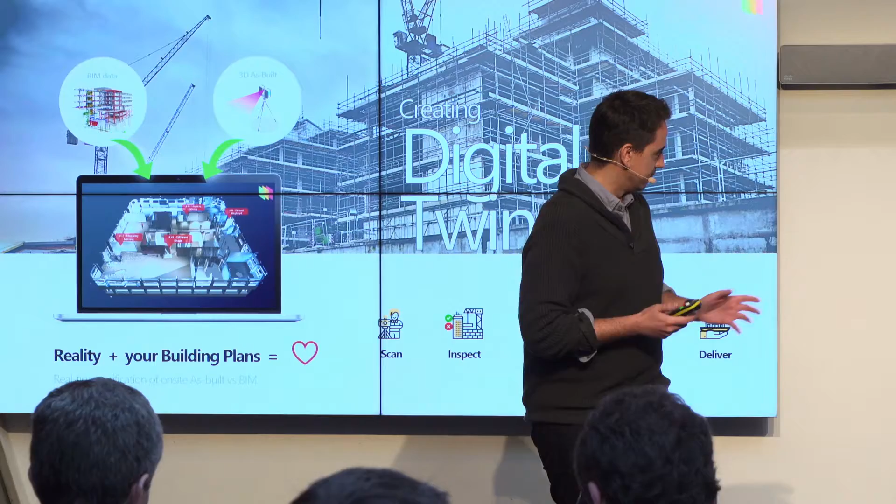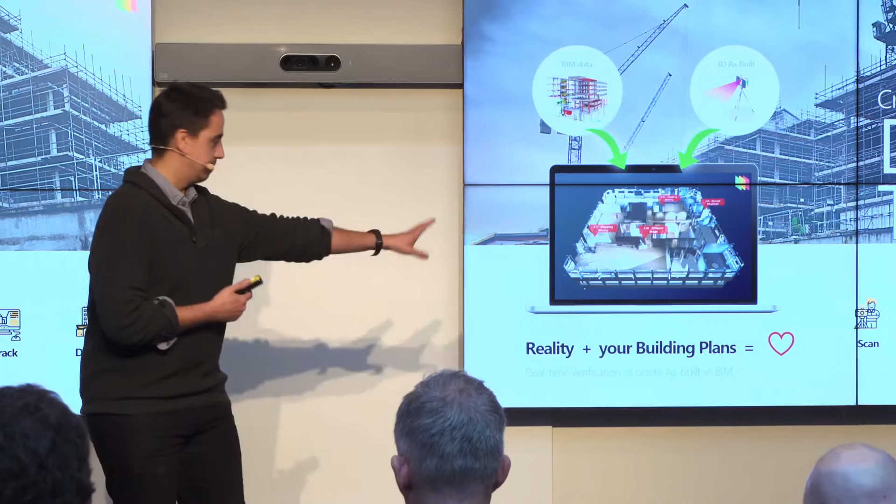The concept is very, very simple. If the on-site reality and the documentation in the building plans match each other at all times, there's love for everybody. For the owner, for the contractor, for the suppliers, the consultants, everybody collaborates better. Everyone's on the same page.

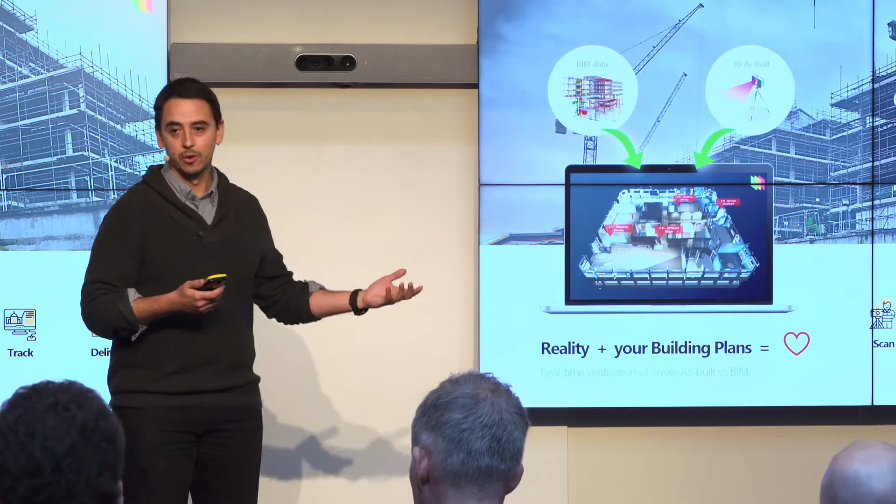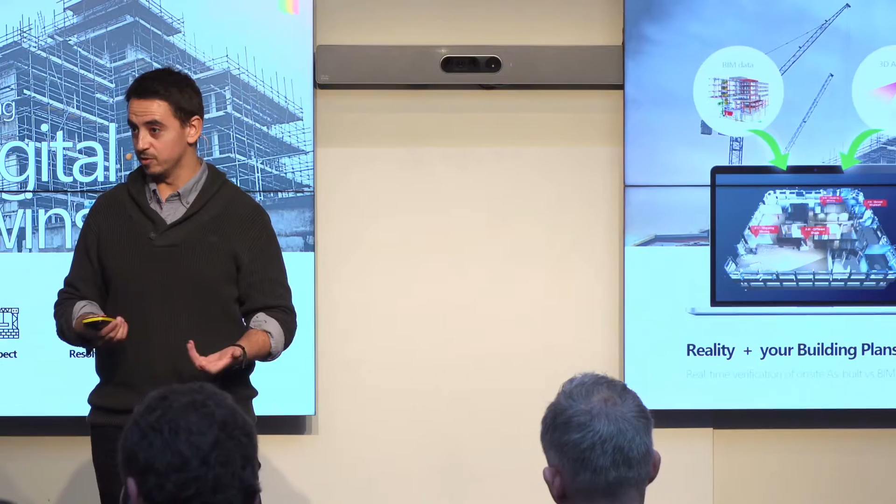So how do we go about making this happen? We've created an online platform that first plugs into your building plans, represented there as your BIM models for your project, and sets those up as the performance targets, because by definition, that's what your plans are.

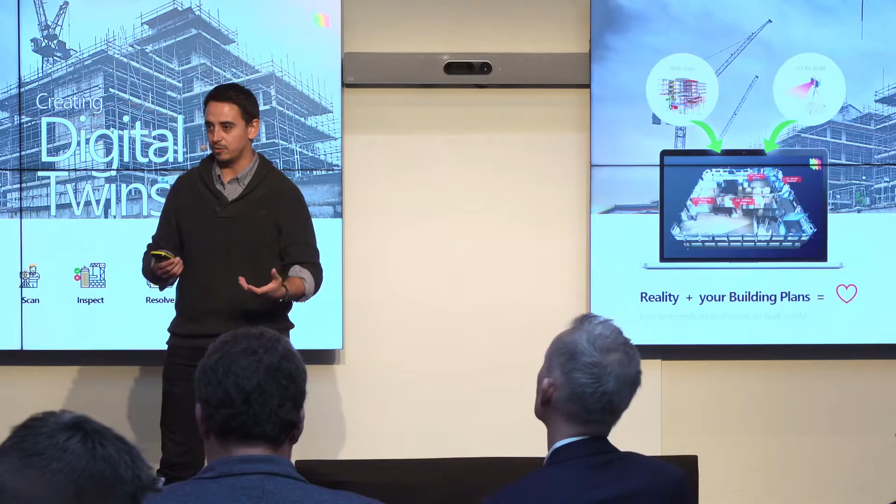And then we've made software that allows anybody to use 3D scanning technology with one button, which means you can do this as simple as taking a photo. Anybody can do this. You've never done it before. You can get started in a few minutes, and in a matter of hours, you've captured an entire building.

You can do it as frequently as you like throughout the construction phase, and the data is uploaded to the platform, giving us the most accurate documentation of the as-built status with millimeter precision in full 3D.

Now the idea is that if the project is on track, then the data we see from the scans should match perfectly with the documentation of the building plans every single time, right? How often do you think that happens? Right, big round number. Never, never.

It never happens. But better yet, there's always differences. There's always mismatches. If everything is on track, the computer finds everything green. When things are missing, potentially delayed, misplaced, built with the wrong dimensions, the computer flags those and reports to the relevant team leader so they can resolve the issue early with minimal impact to the project.

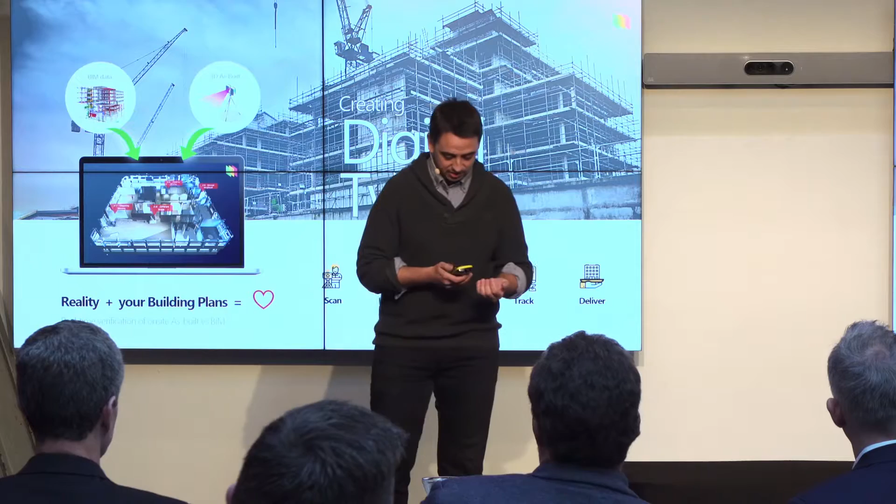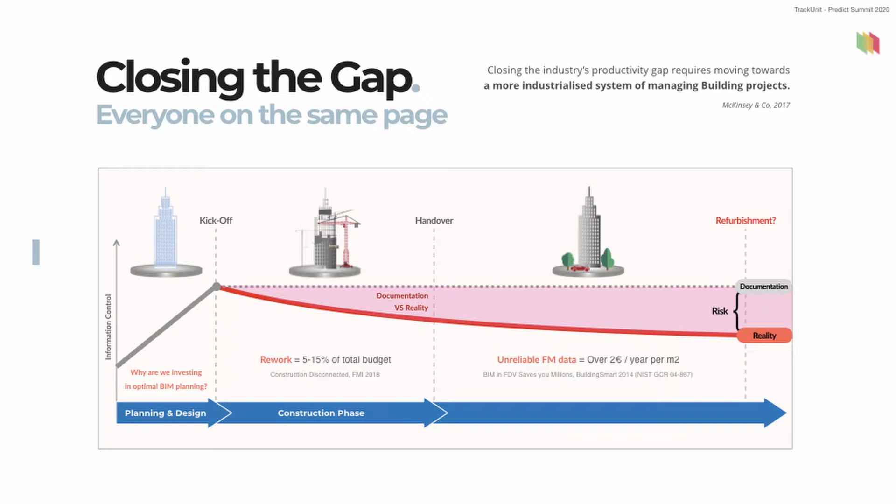We think this is a huge opportunity to change the current scenario of the industry, which is what we see here over and over. We see a huge investment going into the early stages of planning and design, creating these beautiful models, optimizing all the disciplines, clash detection, energy efficiency of the building. And why? Because the better you plan, you minimize risk, and the project will definitely go according to plan.

But that's not reality. When the construction phase starts, there's no system in place to methodically check if what's getting built is actually going according to the plans. All of that is done today manually, in-person inspections with the photos and spot checks and the schematics. There's no way to keep track of tens of thousands of moving parts.

So things are going to go overlooked and rapidly snowball into costly problems. That's how you have costs, downtime, delays, disputes. The owner at handover is going to get a building with documentation that doesn't really match what was built. And that's terrible. If he has to maintain this facility for decades, imagine you just bought this massive machine, complicated and very expensive, right? And you can't trust the user manual.

You wouldn't accept that with your fridge at home. And I love that quote from McKinsey there, that the industry really needs to start adopting a more manufacturing style of running projects. And I think that's exactly what needs to happen here.

In a production line, what you do is take samples at high frequency, not just of the product, but all the moving parts of the machine. And at the early signals of something going off track, you adjust. A very agile workflow. You don't ruin the entire batch by not paying attention.

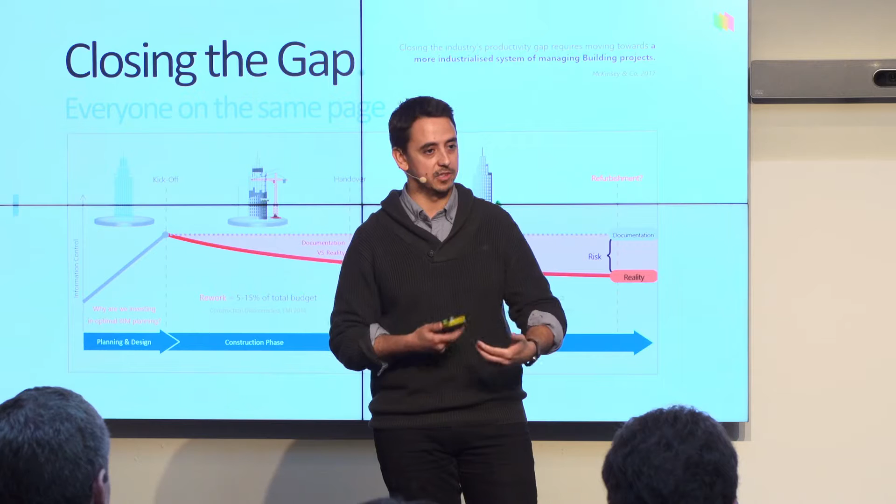And of course, a building project is not a production line, but I want to show you how this type of systematic workflows can be implemented in practice.

And this is an example of a workflow that we typically help our customers implement in all their projects. This is a weekly cycle.

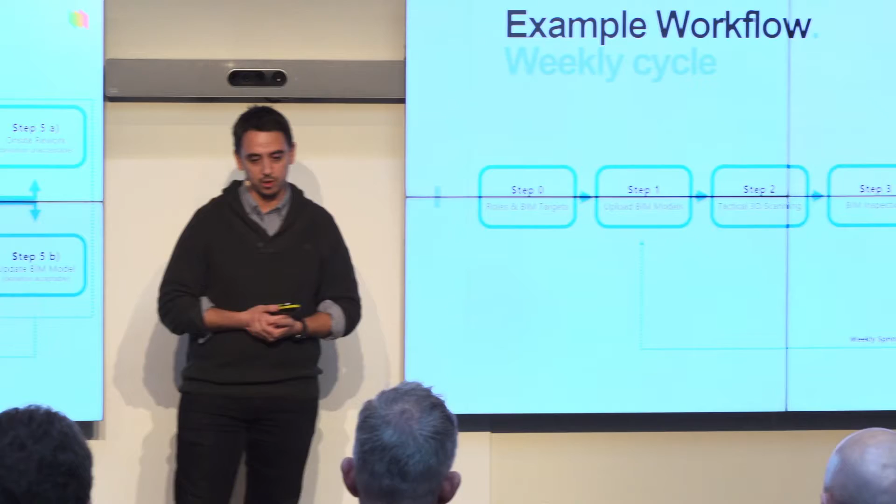It really could be any duration you like, but weekly is more than enough for most projects. We normally start with step 0 before the construction begins, just to set everything up with all the participants.

Step 1 is about synchronizing the building plans with the platform. Step 2, the on-site teams start making scans and submitting it online to be inspected by the platform in step 3. Everything that is not according to the plans is reported to the team leaders in step 4, who need to essentially decide what to do.

There's virtually two choices they can make. Either the issue is not acceptable, pinging the contractor to resolve the issue on site under 5A, or we leave things as they are, it has no impact on the project, we're not going to rework, but instead the design team is notified they need to update the BIM models so that they're always as built.

And I want to show you how this works. I want to go very quickly through the cycle with you. Uploading the BIM models is as simple as drag and drop. If you're running BIM projects, you have all the information you need in your computer to upload this.

These are the models that come out of the planning stage. And in a few moments, you can see on the platform in the 3D viewer what was uploaded. What I'm showing you here is a BIM model of our new office in Oslo.

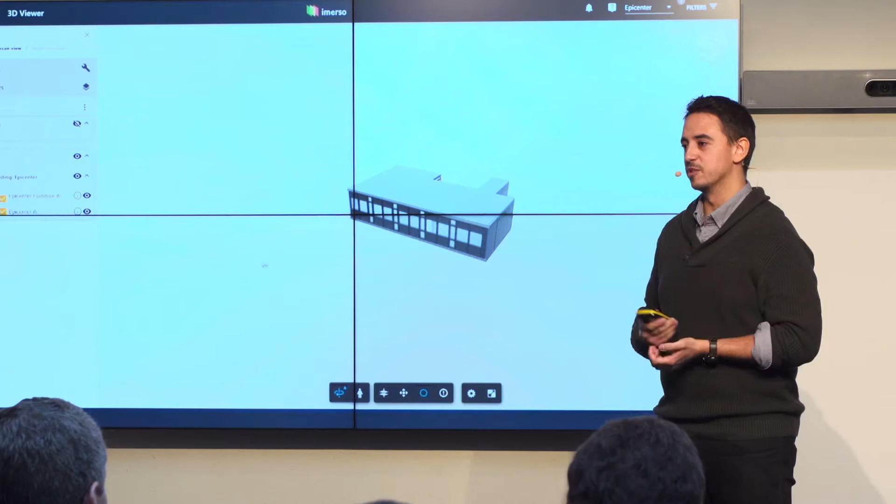We just took over a couple weeks ago. And of course, the first thing we did was to make a BIM model out of it with furniture. And here's a quick tour of our new home.

So the platform is now ready to receive 3D scans. And these are done with any off-the-shelf equipment. And these things are getting cheaper year after year. You press one button, the data is uploaded.

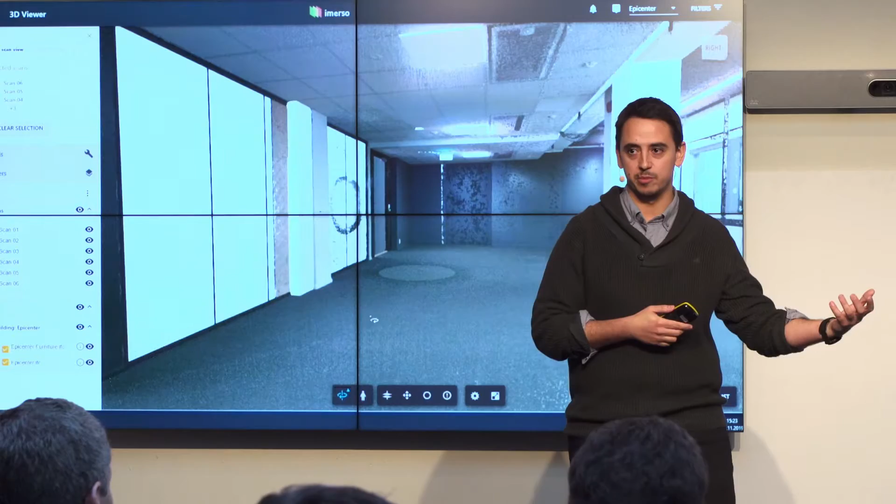And here you can see a scan of our office. And in the platform, you can merge the real data from the scans with the virtual furniture, for example, and create this type of mixed environments.

But you'll notice that the 3D data lands in the right place automatically in the BIM model, which is extremely handy. And you can navigate this data just like a 3D game, but you also have 360 panoramas like this, like Google Maps, which gives our users a lot of insight of what's happening out there on the job site.

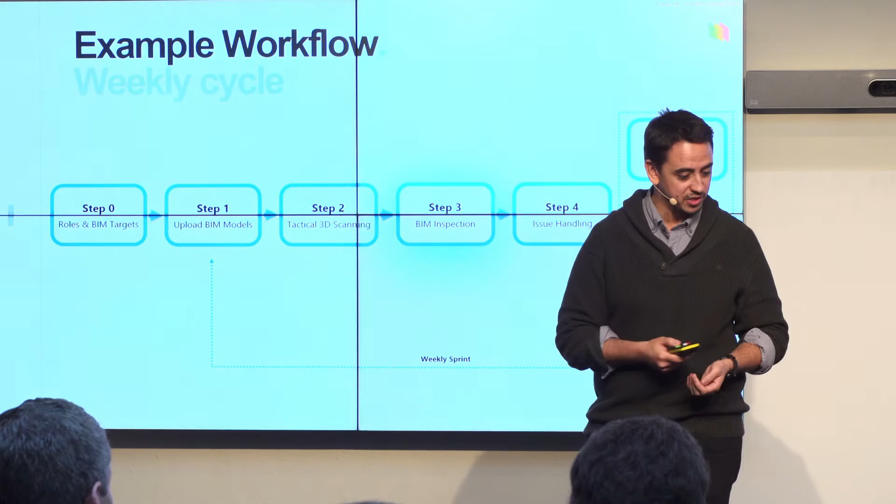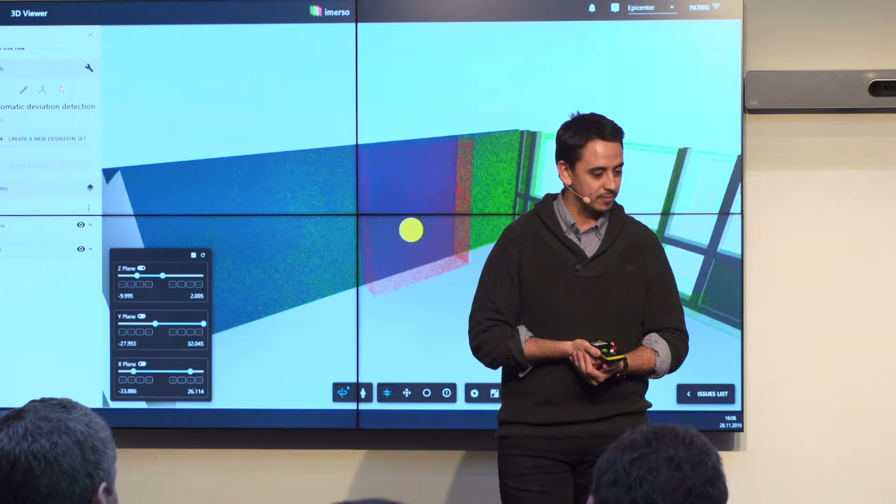So the data is now ready for inspection, and the computer is going to look at the specification, the tolerances, the schedules for the different disciplines. In this example, it flags in red a few columns that are either missing or misplaced according to the BIM model. And it's going to create a report out of these objects to send to the relevant discipline leaders.

Who receive this information in step 4. And they can review the details, they have different insights, so they are very quick at deciding what to do. In this case, column move to the left 32 centimeters.

They can also access the 3D data to take any measurements they want, discuss with their colleagues. In this case, they're going to commission a BIM update. We're not going to tear down the column. There's a whole building sitting on top. Much easier to do a design update.

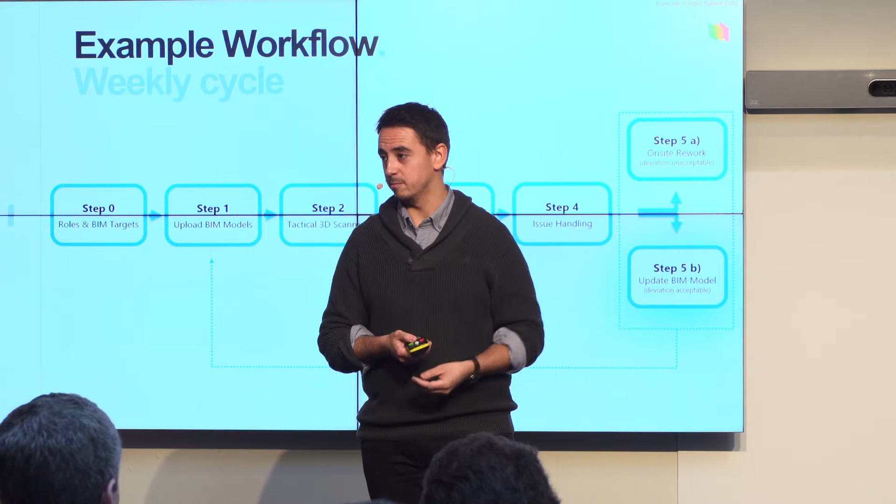And when all the issues are processed, they're now flagged as in progress. So in this example, the contractor is off the hook, but the designer instead picks up the hot potato to do a design update. And the first thing he does is to export the relevant scans to his computer.

This is all open data, which means you can use any software tools you like. He also exports the reports with all the details and the instructions, what needs to be done. And in this example, he's using ArchiCAD as his design environment. He could be using Revit or any other tools you like, and simply uploads the data in there.

So when he loads the scans, again, they land in the right place because they share the same coordinates as the BIM model.

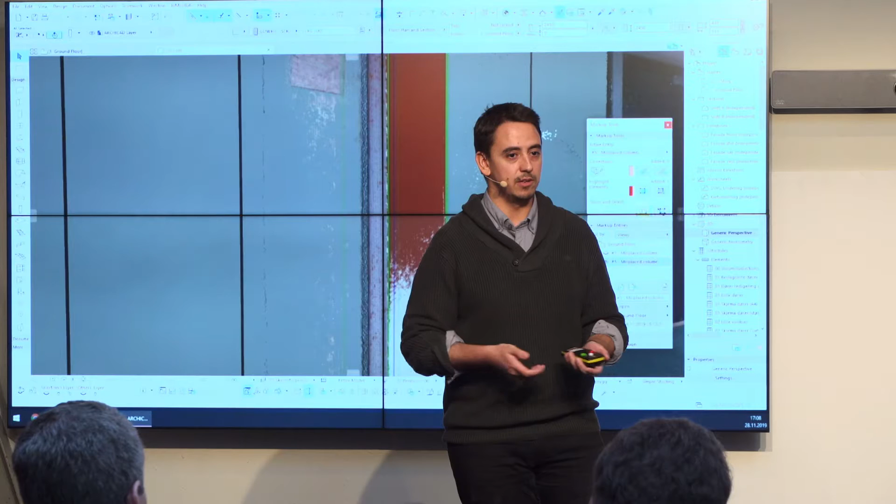When he uploads the report, you can see what needs to be done. He just drags the objects around until they match the real world position—32 centimeters to the left, and again. When everything is in the right place, he saves the file.

That's it, the BIM model is now as built. He goes back to the platform to close the issues. The issue is resolved, he signs, and when he's done, all the issues are marked as resolved.

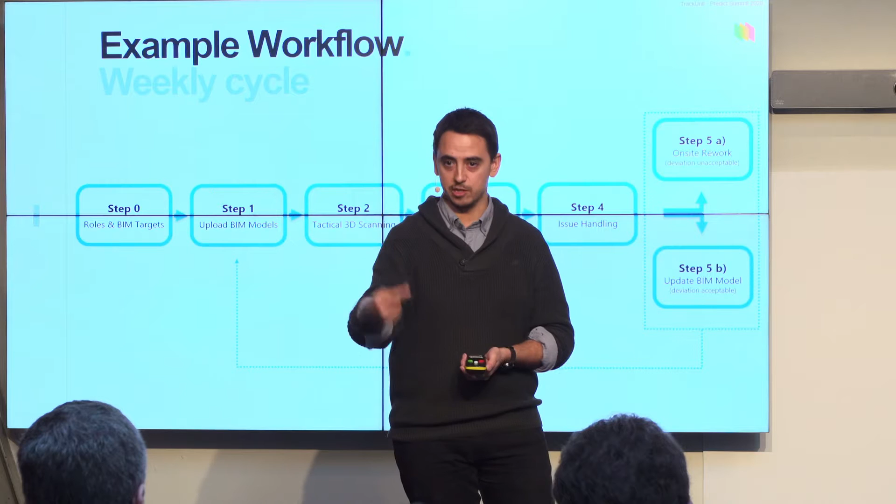That's it. So at the end of the week, all the new BIM updates are re-uploaded back into the platform. The BIM model is always as built, and the cycle starts over, again, week after week.

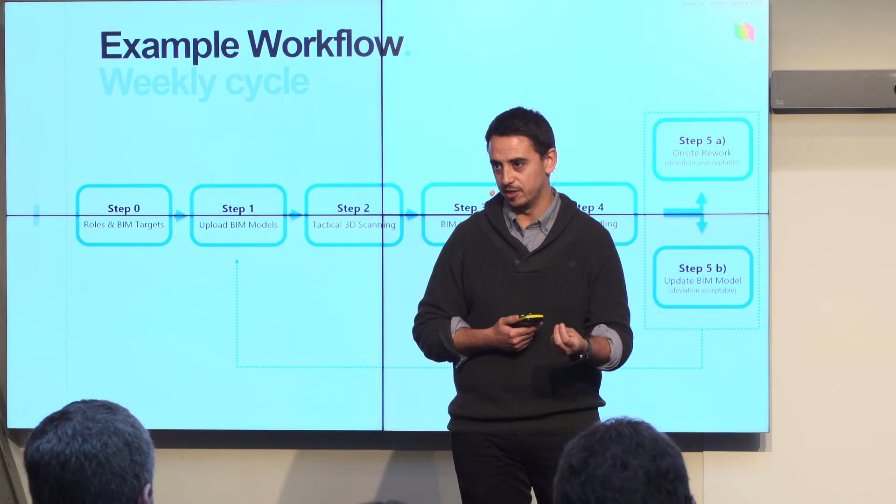I also want to point out step number 4. This is the area where all our users want to spend their time. These are smart people, educated, trained. They want to spend time solving problems, finding solutions. They don't want to be walking around on site trying to find the issues in the first place. Those are non-value adding tasks that can be automated, so they can focus on what really matters.

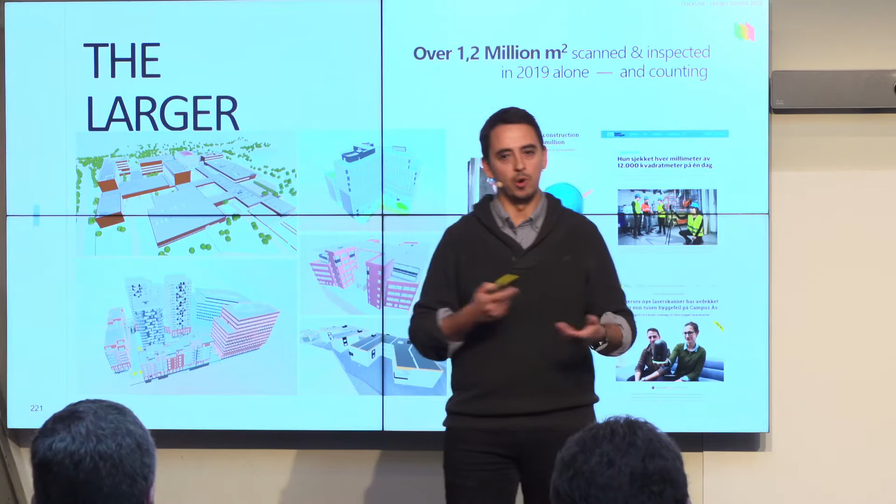We've implemented this in a small project, 600 square meter refurbishments, all the way to some of the biggest projects in Norway with several hundred thousand square meters. The results are very interesting, and I wanted to show you just a handful of my favorite examples and our learnings. I want to start here.

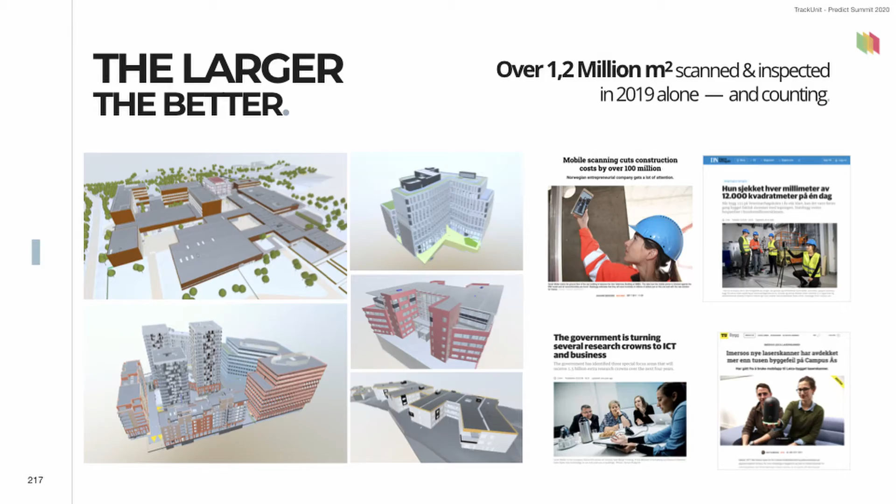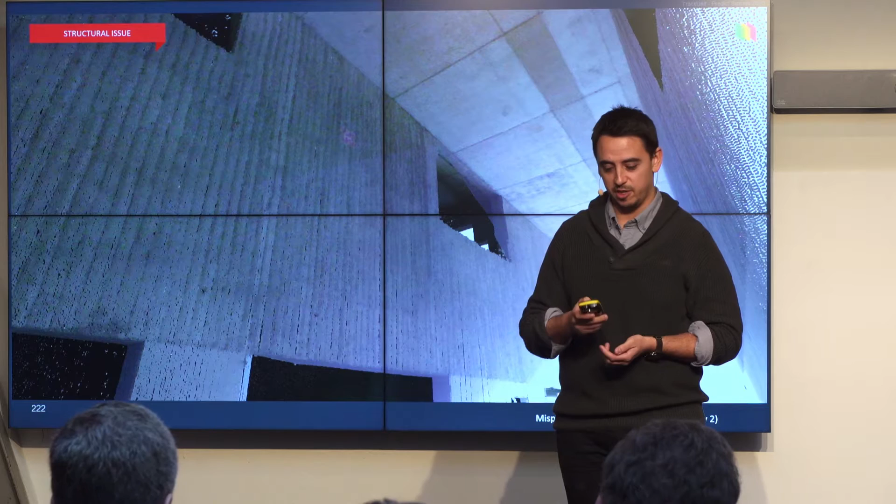This is a very cool example, very early in the structural building phase. The computer found a problem with that opening in the wall in the center of the image. I want to see if any of you can spot the problem.

So by flagging that the opening in the wall was misplaced to the right by a few meters, of course the contractor is notified—they messed up. But the immediate consequence of that misplacement is the clash with the upcoming ventilation equipment team.

If this hadn't been reported this early, the most likely scenario is that the ventilation team arrives and, surprise, they can't do their job. Now they are idle. You have one team having downtime, and their bosses, the engineers, are now doing overtime hours to solve this problem in as little time as possible.

Should the contractor close that opening and open a new one in the original position? Should we reroute the ventilation equipment to go through the new position of the opening? That might affect the energy efficiency of the building the way it was planned. And you need to make all these decisions under pressure. So the timing of finding these issues early has a magnitude of impact on the cost-saving potential.

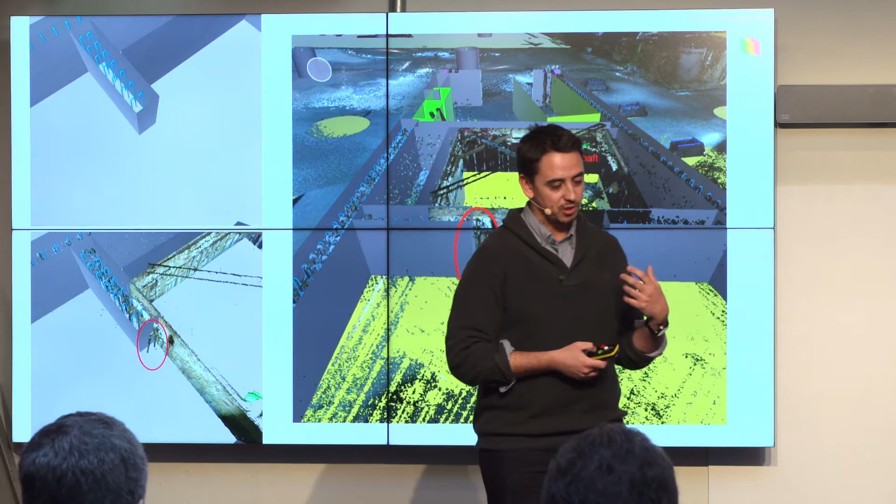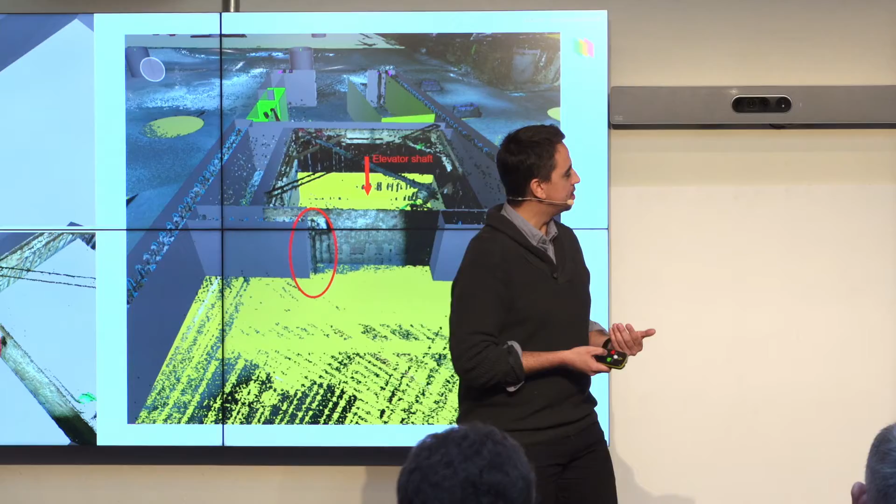This example is also very cool because it shows how we can solve a problem before it happens. What's happening here: there's a wall on site, a concrete cast wall according to the plans. And what we see in the 3D scan data, these little objects here are reinforcement rebar, these metal rods coming out of the floor.

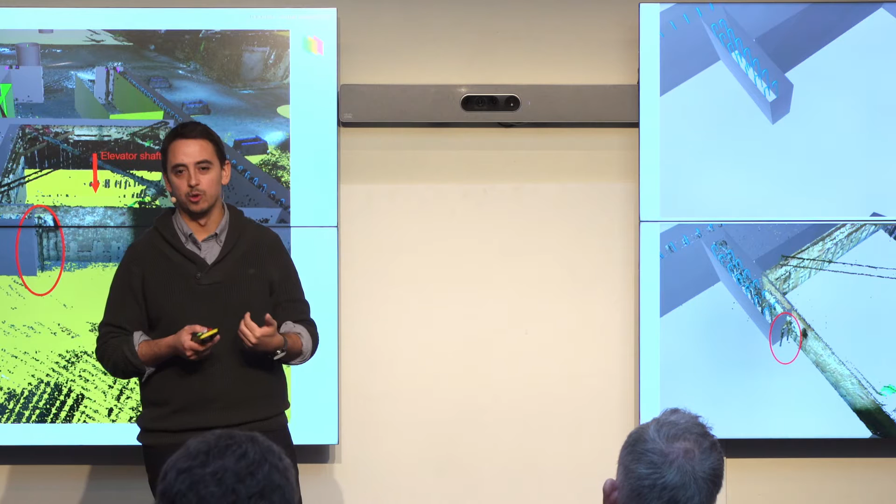The contractor team was about to bring up the casts to start casting this wall. The computer flagged that because this location is a very low tolerance place—it's the entrance to an elevator shaft—so everything needs to be very well within tolerance. It flagged that a few of the rebar were too long. In other words, if they casted the wall, they would have made a too long wall.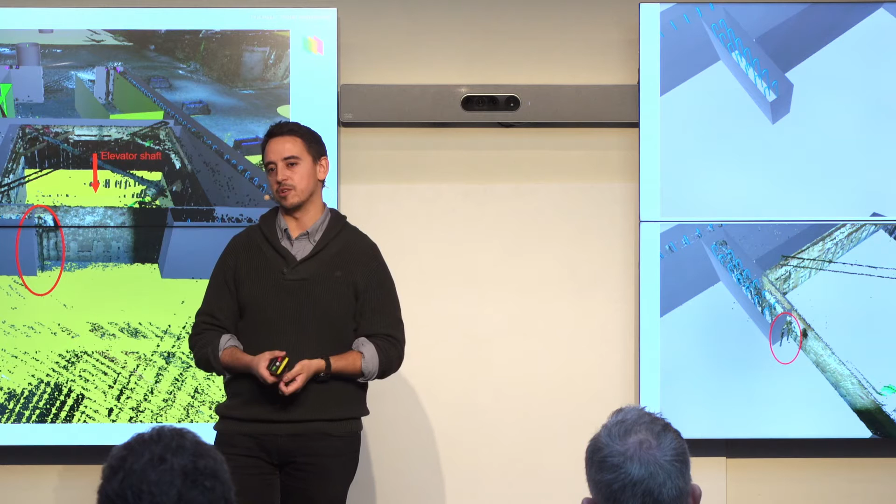Since this was flagged early, it's so easy for the contractor to just cut them, instead of having to cut the wall after it's casted.

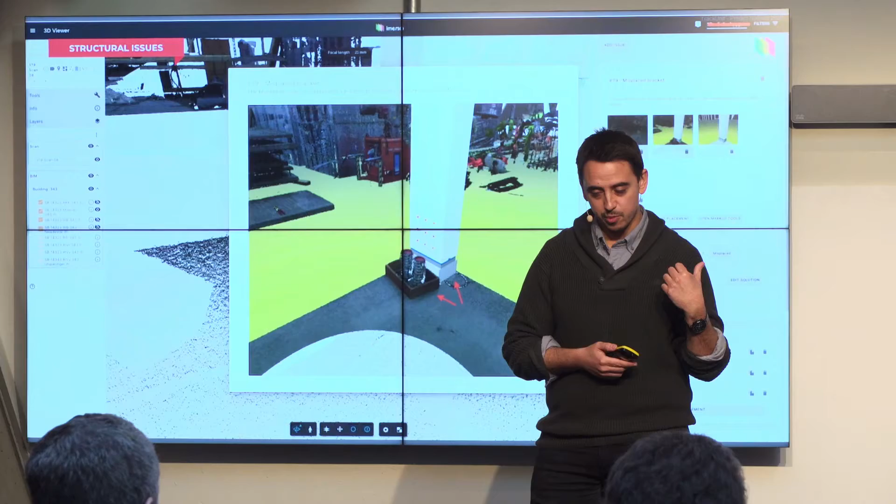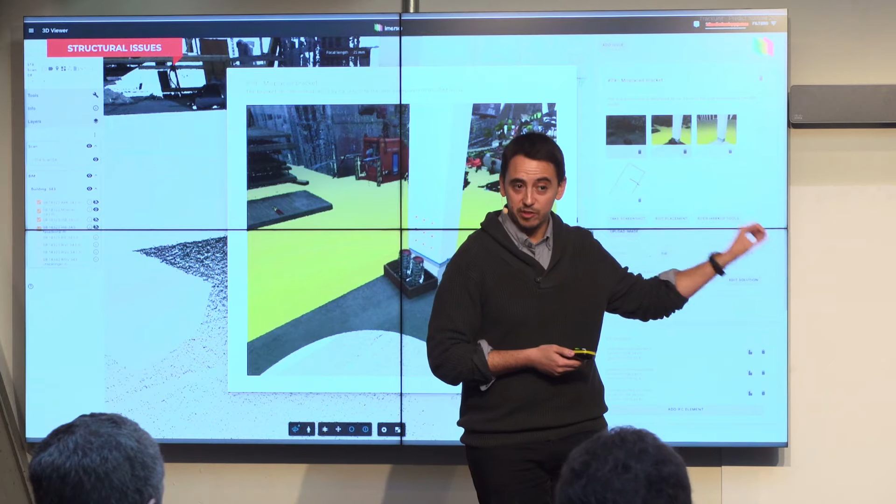We see this a lot. This is a different setting. We see a lot of projects going in the direction of modular and off-site construction, prefabricated, as a way to avoid the on-site work and increase productivity, which is great. However, it puts a lot of pressure on making sure that the interfaces are correct—things need to fit like Lego.

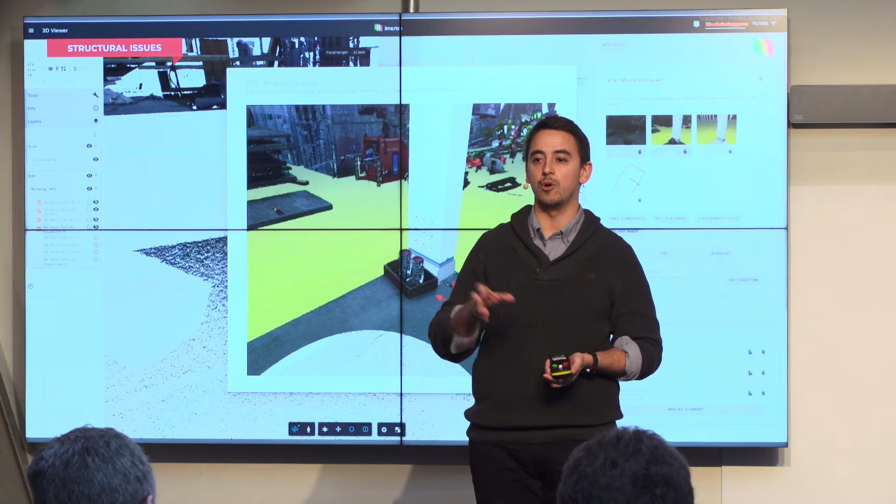In this example, the whole top floor of the building—all the columns, all the ceilings, the roofing—was prefabricated. And we saw in the data that the foundations for the columns were all misplaced, which means when the columns arrive on site, they will never fit. Everything needs to go back to the drawing board.

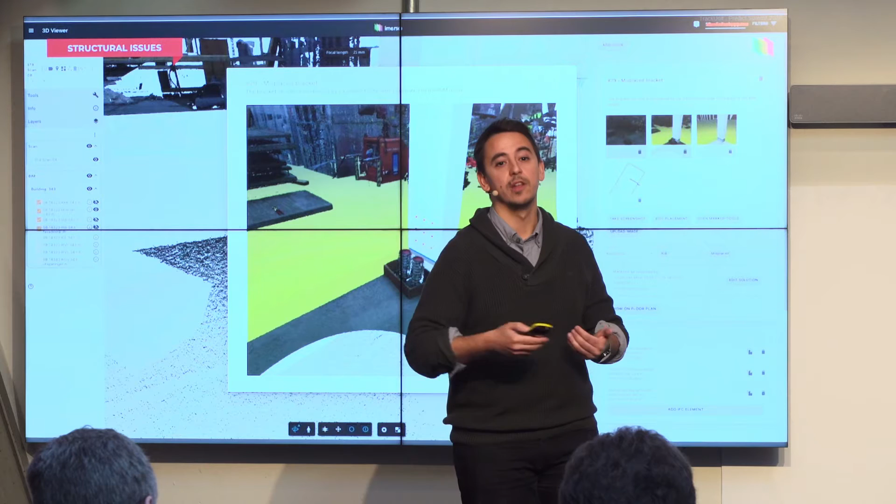And it's so easy to fix well in advance of the equipment arriving. And we can do other cool things with the data while we're checking the position of the columns and the openings in the wall. Why not check if the floor is flat?

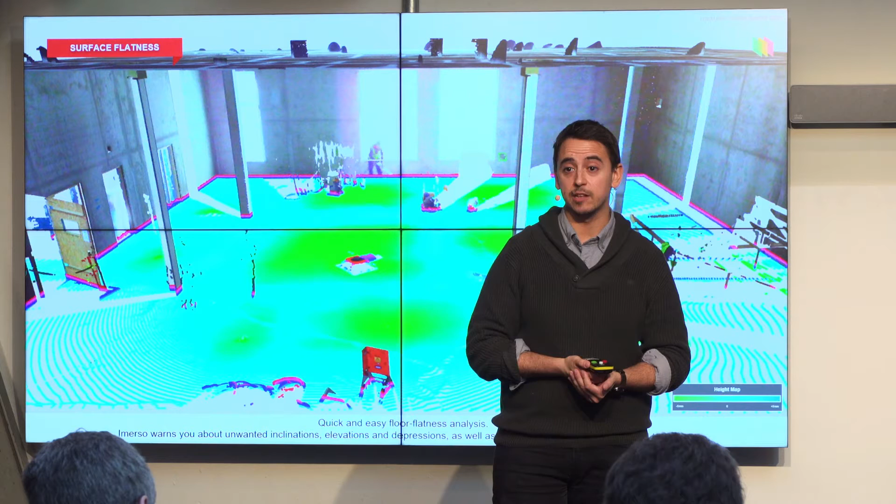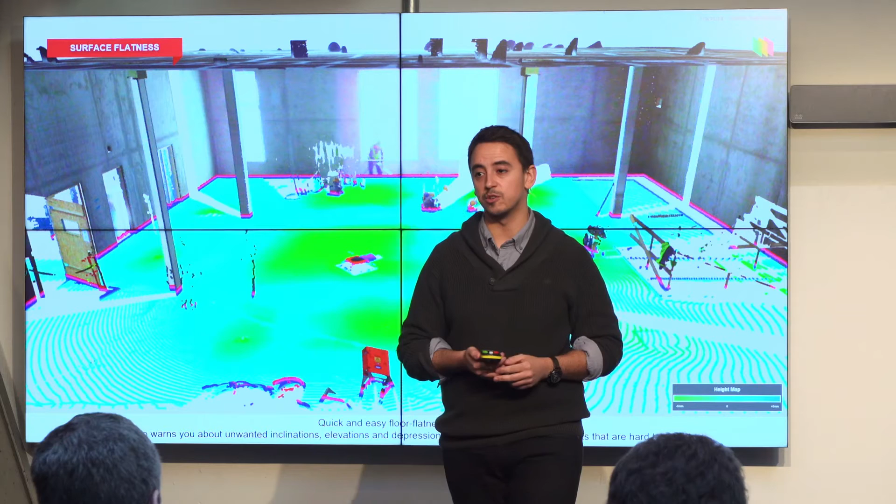This is a height map. Essentially, the areas in green are a few millimeters lower than zero, and the blue ones are a few millimeters higher than zero. This is an area where there will be water on site, and there's a drain in the center of this room where the water needs to flow out. The computer flagged all those areas in green around the center as water pockets, where the water will accumulate.

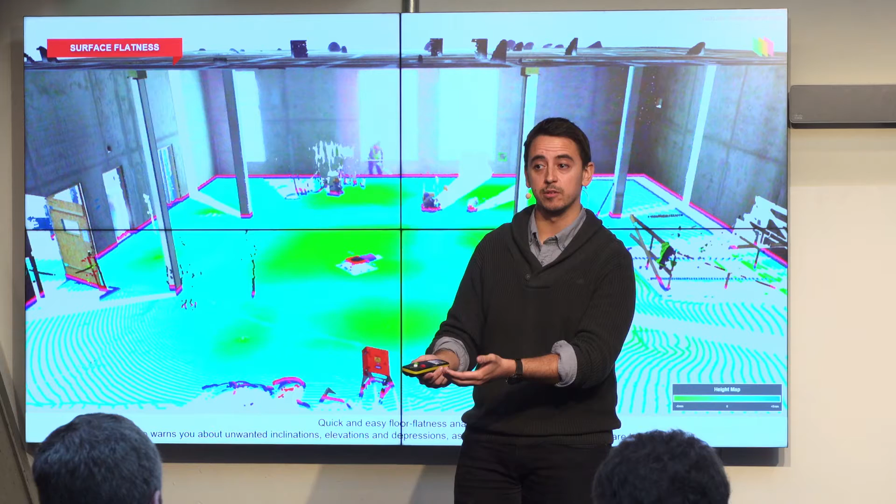And it takes 2 minutes to get this data. Today, you know how this is done—with a ruler with a bubble in the middle.

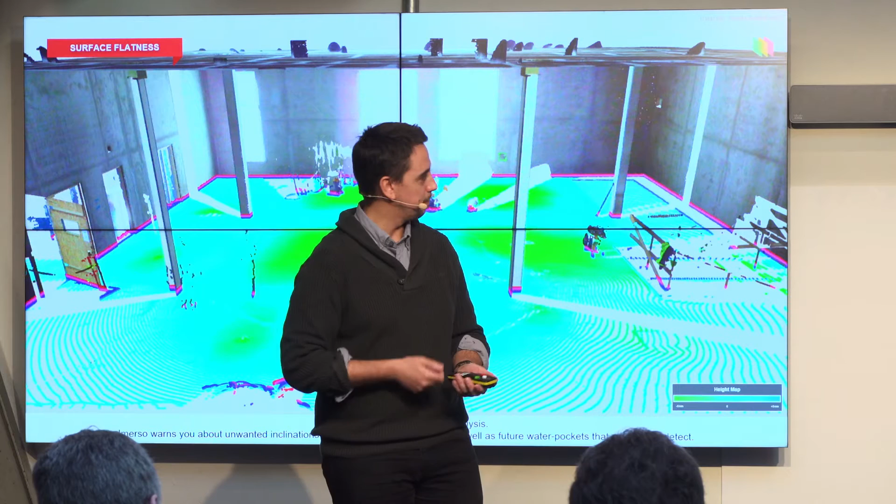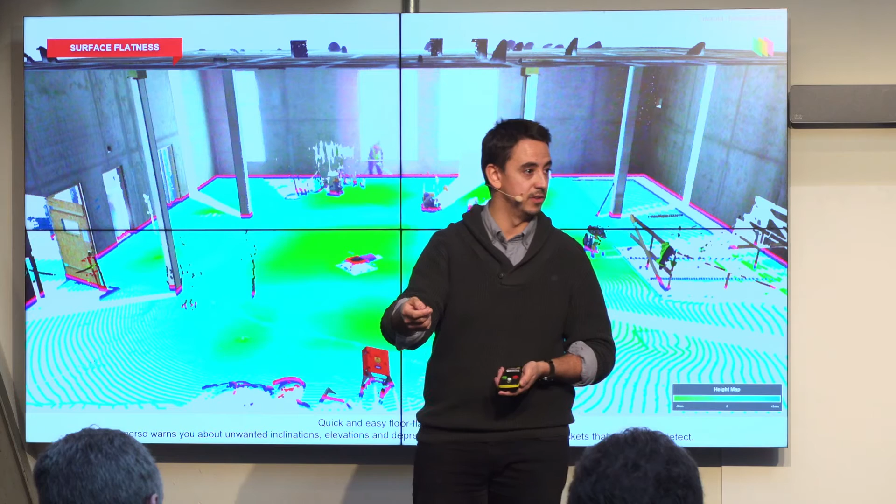So for the contractor, this is very easy to fix, either by adding cement or sanding out the areas in the elevations in blue. But if this had been overlooked, the owner could be stuck with damage to the concrete floor slab decades after the handover—terribly more expensive to fix than now, during the construction phase.

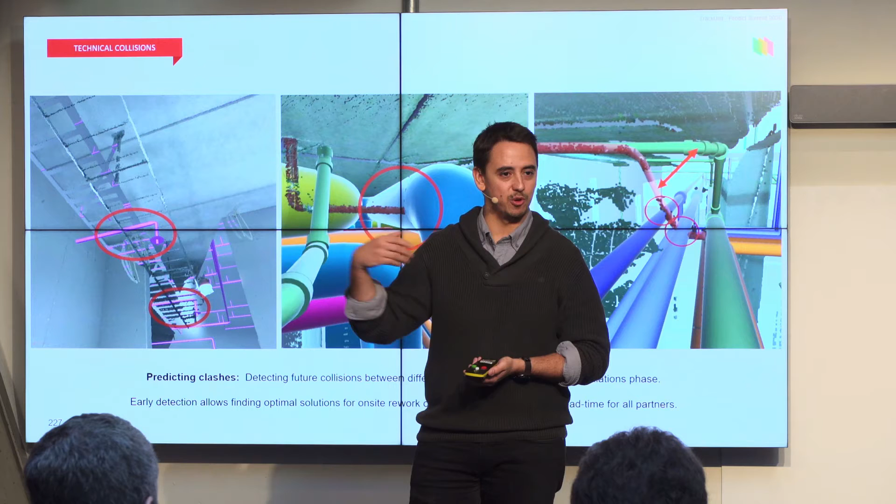I just want to show this example because it's by far the most common: clashes in the technical disciplines. Essentially, what happens is somebody installs something in the wrong place without realizing that they're occupying the space reserved for the next discipline. So the next discipline arrives, they can't install things as they should—they're idle, or they're going to improvise.

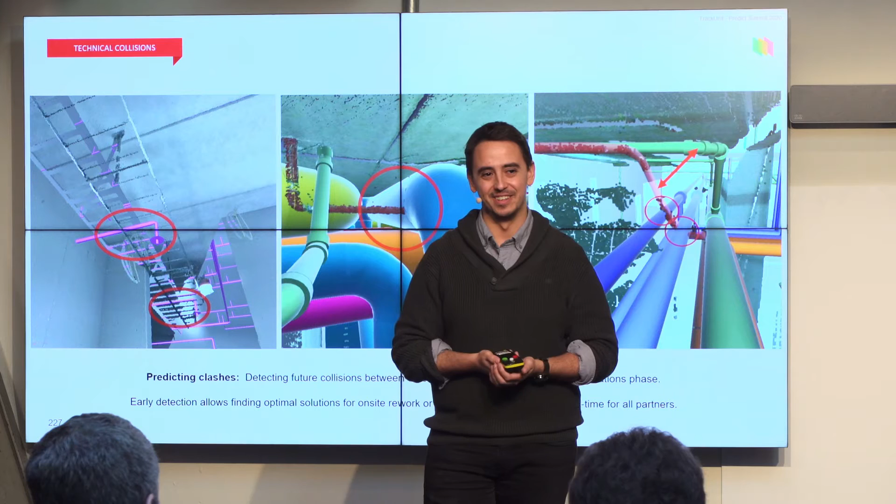And trust me, these guys are stubborn—they're going to find a solution. But again, without realizing, there might be compounding on the problem. When this is reported early, though, it's so easy to put things as they should be or adjust the building plans.

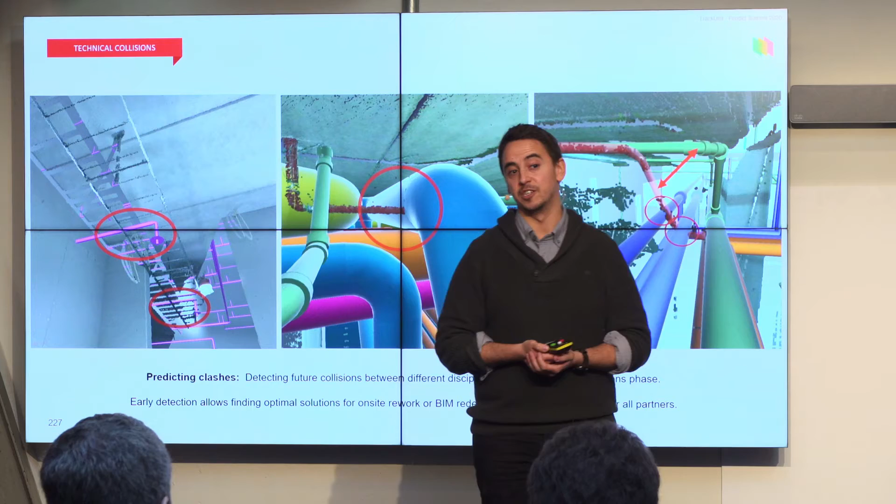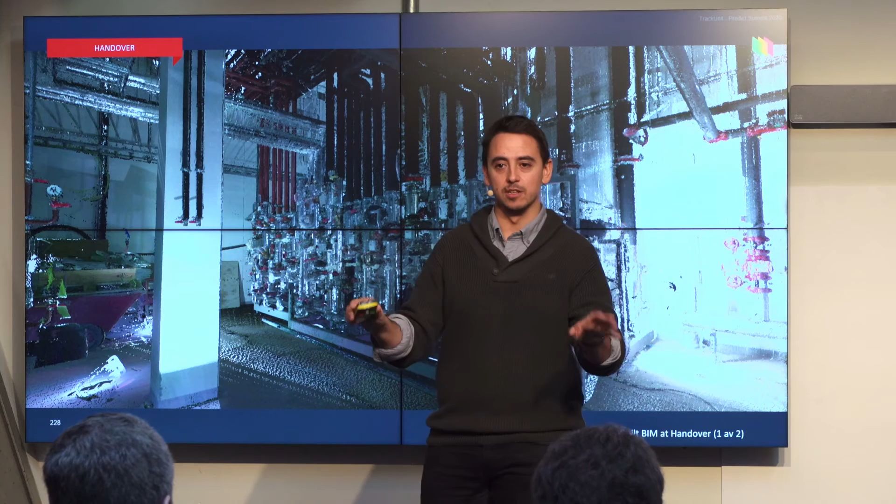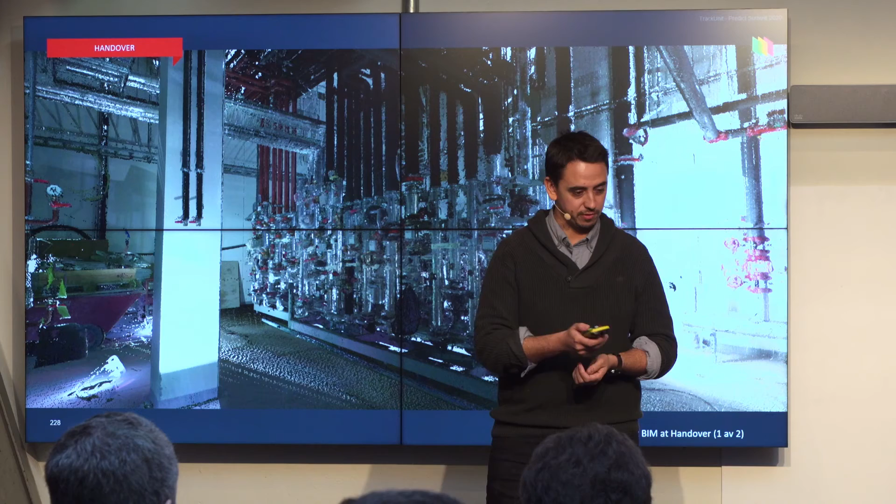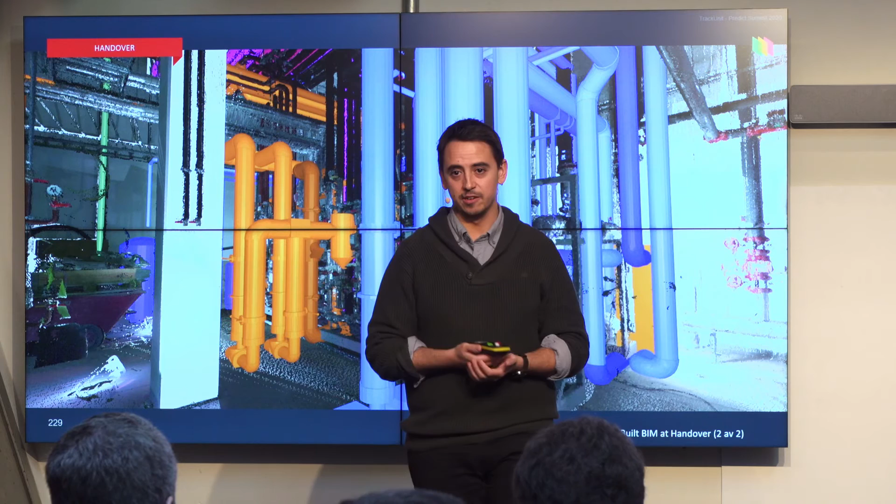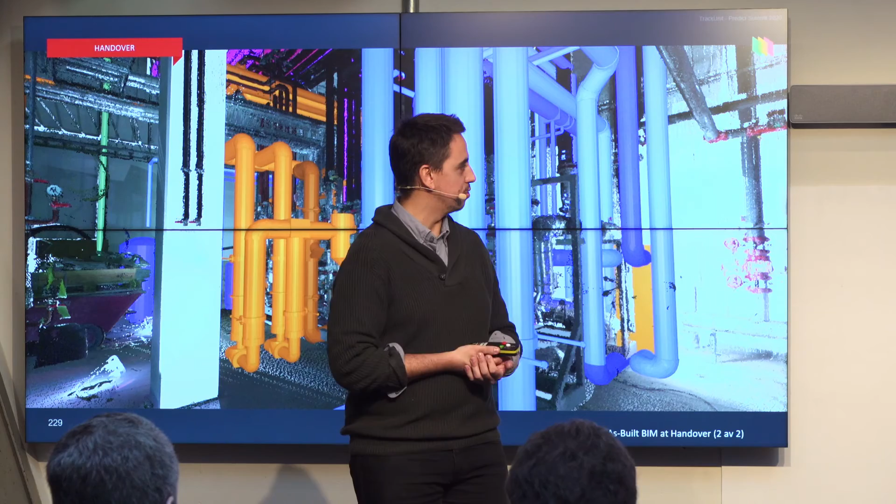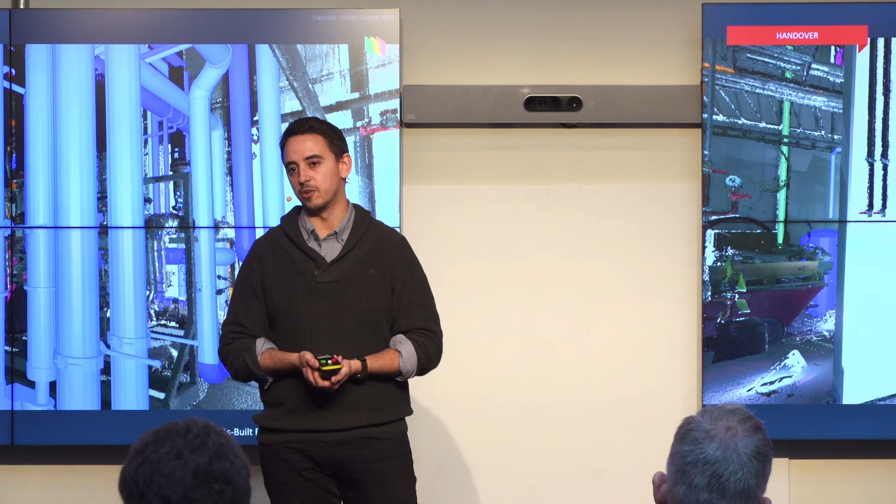Does anybody notice anything? So imagine you're the owner—you don't have access to the scans, let's say. You have to operate this building based on the documentation that was submitted to you. You're screwed. So you hire somebody to go on site and install a smart sensor in this orange pipe. But what pipe, right? So when it's presented like this, it's a matter of minutes for a designer to just move things around and put them in the right place once you know where the deviations are.

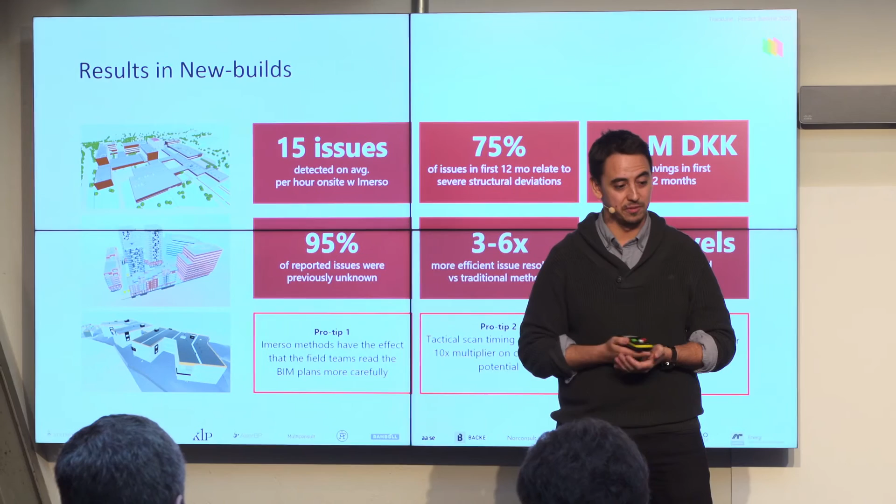So I want to finish with the results. I'm very proud of this slide. Almost 100% of the issues reported by the system were previously unknown to the project teams. There was no registry in the issue tracker, mainly as a result of the speed and the high frequency. There's no way to have that efficiency manually.

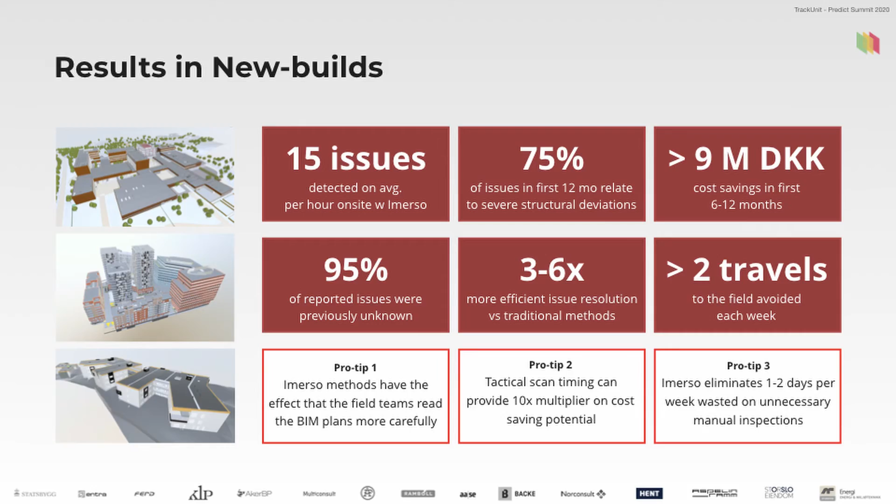It's a more efficient way of finding the problems, of course. But because of the details in the data and the context, people just look at these images and they know what they're looking at. There's no need to go on site and have a big discussion, which means the teams themselves become much more productive and can resolve 3 to 6 times more issues per hour than the current way of working with schematics and thousands of photos to go through.

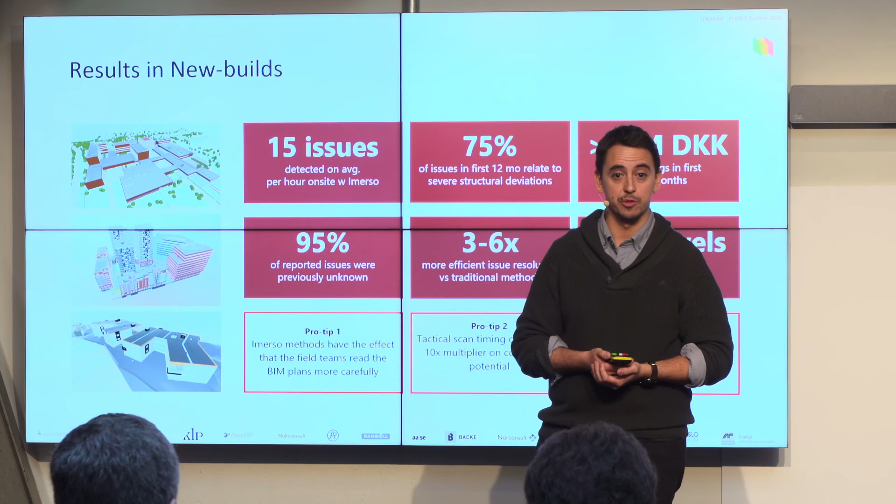And again, because you can visit the site virtually by logging into the platform, you don't need to travel, which means if you're missing a measurement or want to take a screenshot, you can do it from your desk. Two travels a week on average per person who had access to the digital twin are no longer needed.

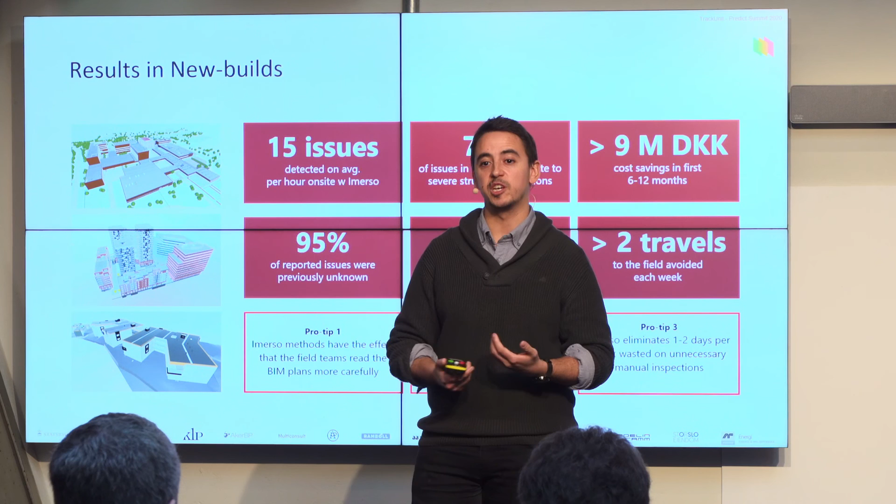So I hope this is, in our minds, a testament of how the industry will be changing in the next 5 years as these technologies become a standard in all job sites. I hope you found this insightful. That's what I had for today. Thank you so much.